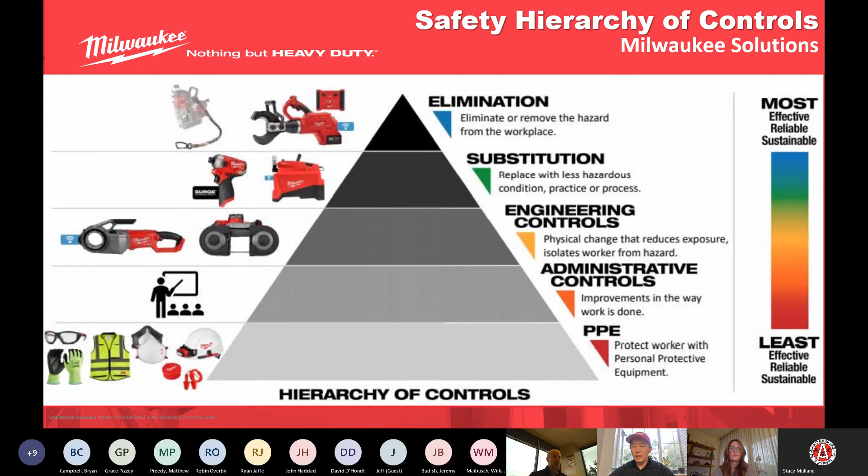And then other tools where we've completely eliminated the risk of injury altogether.

What we're trying to do is really eliminate, reduce, and prevent these main seven pillars of safety that we adhere to when we come out with product lines. We have a whole product line dedicated to dust, a whole product line dedicated to vibration and noise reduction, and ergonomics. We have our whole ergonomics division where we test the best way and the best posture for our users to hold these tools while doing a specific task, as well as built-in safety technology to prevent acute injuries with our rapid stop tools.

We have a huge range of lighting solutions to provide more visibility and reduce trips on the job site, as well as tools we launched this year called MX Fuel, which we'll talk about later, that completely reduce emissions caused by gas products. As things transition from fossil fuels to battery operated technology, we're trying to be at the forefront, and that's the reason we created the MX Fuel platform to power light duty equipment. Our PPE line really wraps everything up as far as preventing acute injuries and providing personal safety for our users. What we're really trying to do is drive a safer job site from start to finish.

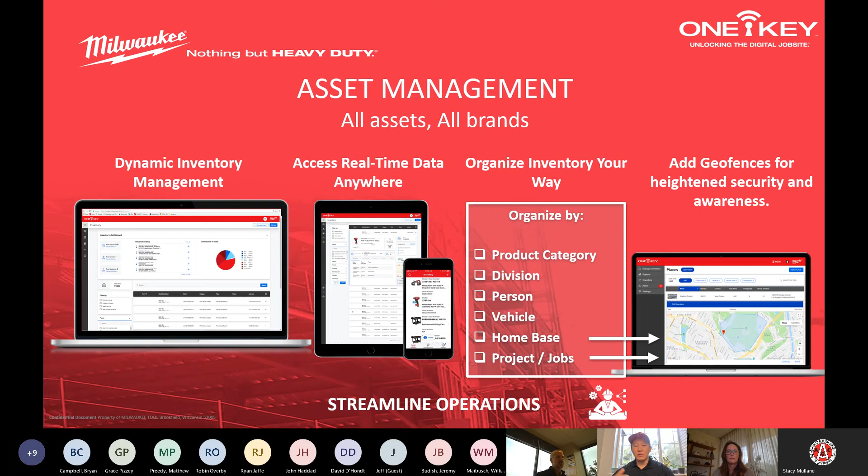The last thing I wanted to talk about is MX Fuel. This year we created six solutions to launch, from our power supply, our core drill that's a lot safer, to our cutoff saw and breaker, as well as our enormous tower light.

The other thing I wanted to present to you guys is our service. We have the industry's best coverage when it comes to servicing our tools and batteries. Our tools have a 5-year tool warranty, and our batteries are covered for 3 years, including any water damage that happens to them as well.

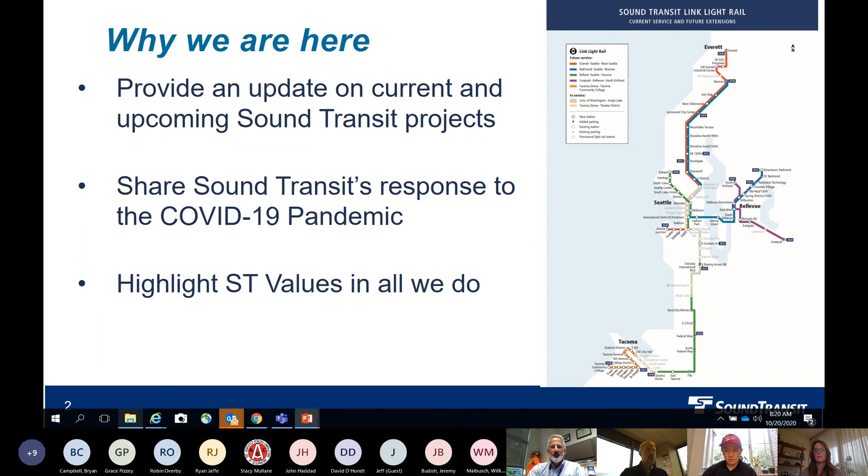So our values are collaboration, customer focus, inclusion and respect, safety, of course, integrity, and quality. I presented these before. I highlight these at every presentation that I do. We hold ourselves to these values, and we would expect, of course, our consultants and our contractors to hold themselves to these same values as well. If you're working for us, you're an extension of ST.

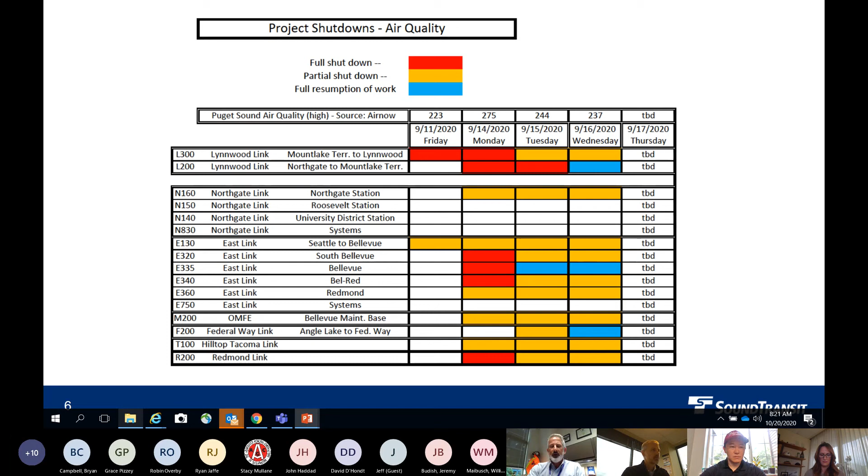Quick safety moment, of course. I wanted to thank all of our contractors for participating in AGC's Construction Safety Week, September 14th through the 18th. Of course, I found it a little bit ironic—that was the exact same week that we had what I call hazardous air quality due to wildfire smoke week. Contractors, of course, showed their usual resiliency and adapted, postponing some activities until the next week, but not canceling, of course, the very important safety week.

So I'd like to just run through real quickly what Sound Transit has done in response to the COVID-19 pandemic.

Then, of course, on March 23rd, the governor issued the Stay Home, Stay Healthy Order 20-25. Sound Transit Public Work was exempt from that—we were allowed to continue to work. However, at that time, we realized that we didn't really understand, as an owner and with the industry as well, what the best practices really were, and we were concerned about not being able to keep the workforce safe. And so through the month of April, we did issue a stop work order so that we could allow our contractors to incorporate all best practices, update their health and safety plans, work plans, get their workers trained and go back to work, and therefore minimize the risk of COVID transmission in the work zone.

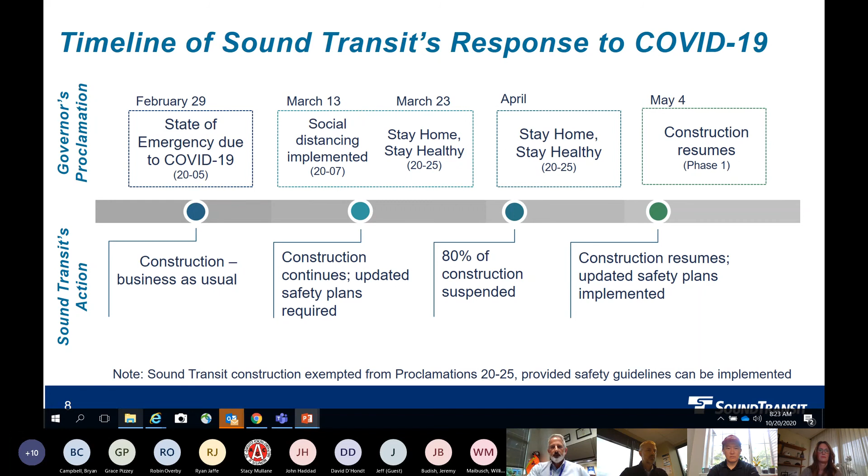During the work suspension period, of course, we had to secure the work sites. 80% of the work was suspended during that time. Only essential work and work that was subject to specific windows that couldn't be moved was ongoing.

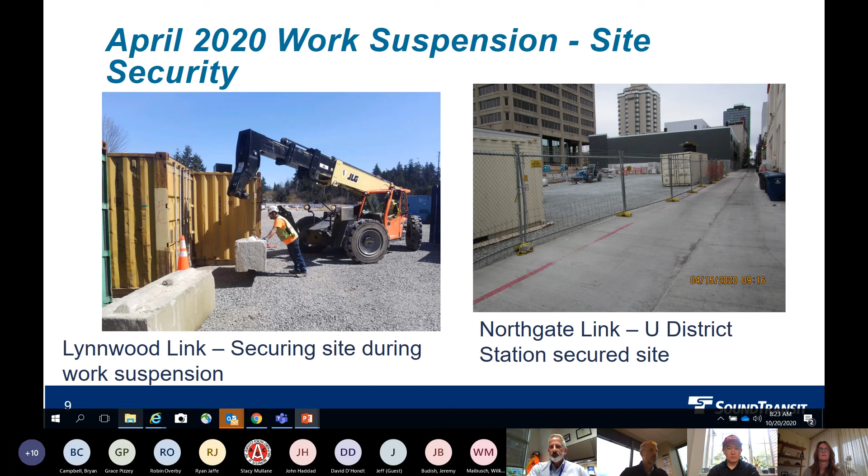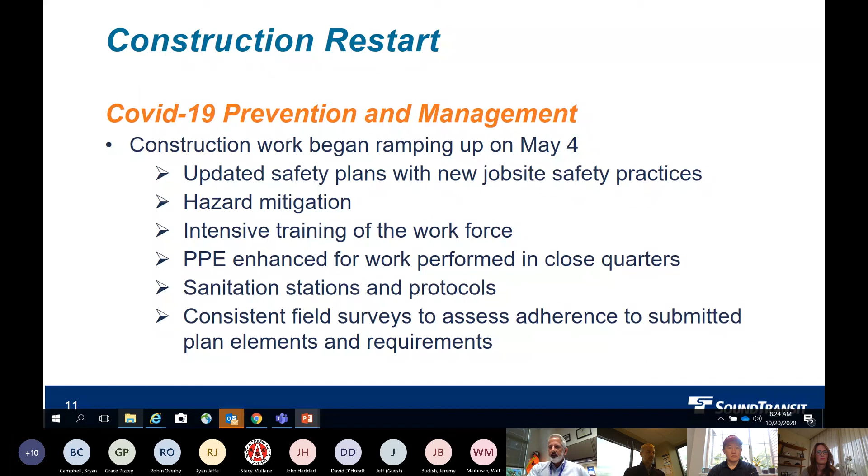After the month of April, we allowed the stop work order to expire. Work ramped up again on May 4th with updated safety plans. Criteria was derived from DOSH, L&I, and the CDC. New PPE, intensive training, sanitation stations and protocols on the work site, some of which you can see here. Temperature screening, attendance for contact tracing—all of that is still in play on ST jobs.

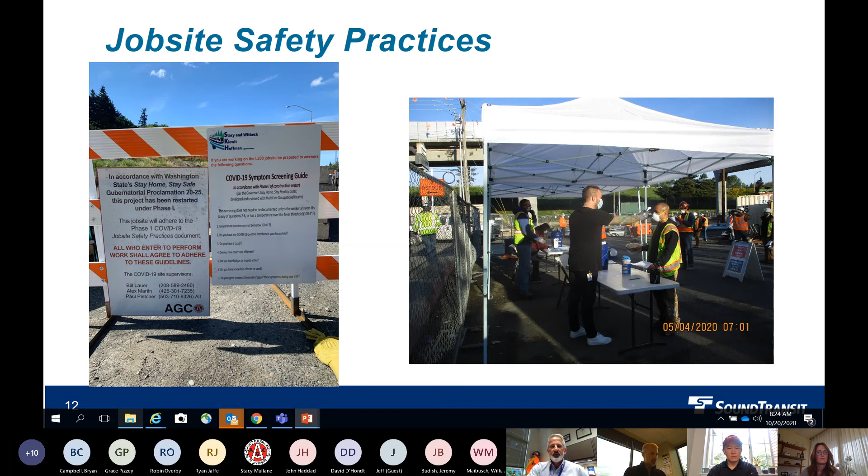And of course, revised meeting protocols, cleaning high-touch surface areas like you see on the right. This was an excellent example of collaboration across the board, all the way from the governor's council, including contractors, labor, local jurisdictions, and peer agencies across the country, trying to understand best practices so that we could have a unified approach and ensure safety for all.

A few challenges we're still seeing: culture change has been achieved from what we can see. Face mask fogging is still an issue, especially going into the colder months. I would ask all contractors to recognize and avoid complacency, especially in the field office. We've demonstrated the ability to not have COVID transmitting in the work zone, and that is key to continuing to advance our construction jobs.

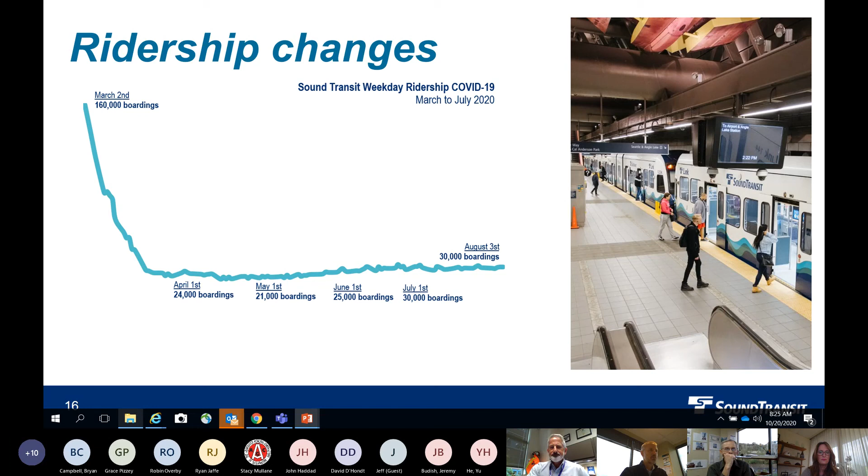Of course, COVID didn't just affect the workforce. Our ridership went down dramatically over the course of March to April. Sound Transit began studying ways to keep our riders safe. Goals were to achieve 100% passenger and employee face covering compliance, increase cleaning protocols on our conveyances, increase public information, and even go to the steps of weekly mask distributions and updating and increasing airflow and filtration on our vehicles.

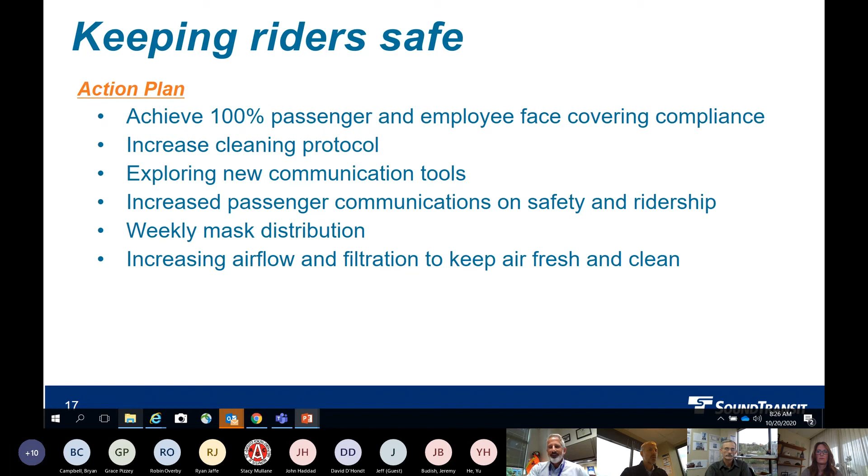September 2020, we began ramping our service back up again because demand is starting to increase. We even offer free masks — if you don't have a mask, that's fine, we'll give you one. It's important that we keep not only the workforce safe, but we take all steps we can to keep our passengers safe as well.

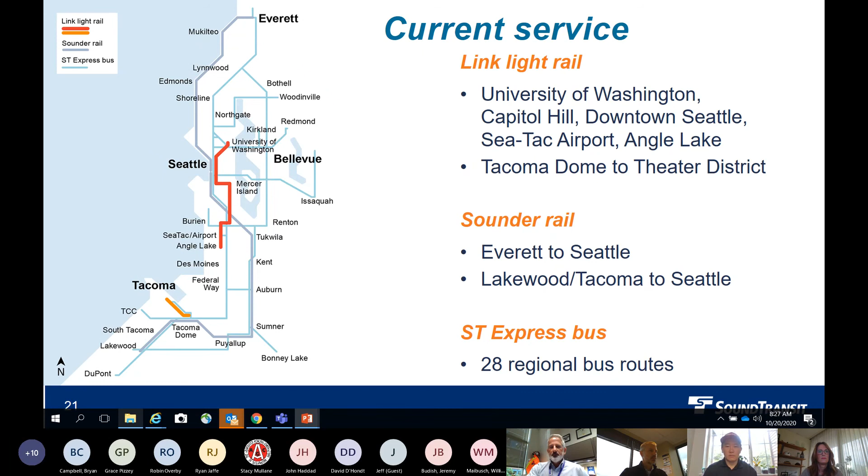So moving on to some updates from our current capital program. Many of you have seen this graphic before. Our current service is a fairly modest single light rail line going from just south of the airport all the way up to Husky Stadium, a Sounder commuter rail line going from DuPont all the way up to Everett, and our ST regional bus routes. Once our system expansion program is built out: 116 miles of link light rail, 83 stations, a brand new bus system called Stride, and expansion of over 40% in our Sounder commuter rail system.

So our construction is going on right now. Every day we have about 2,000 construction trade workers on the job across the program. We have 152 new light rail vehicles under procurement, 40 miles of light rail under construction, over $15 billion worth of active construction jobs across all phases, 9 major project alignments, 8 track bridges on I-90. Project expenditures right now are running about 94% of planned as of August, which is great.

And of course, we are One Sound Transit. We've had months where we're exceeding about $200 million of construction expenditure each month, so it's a very busy time.

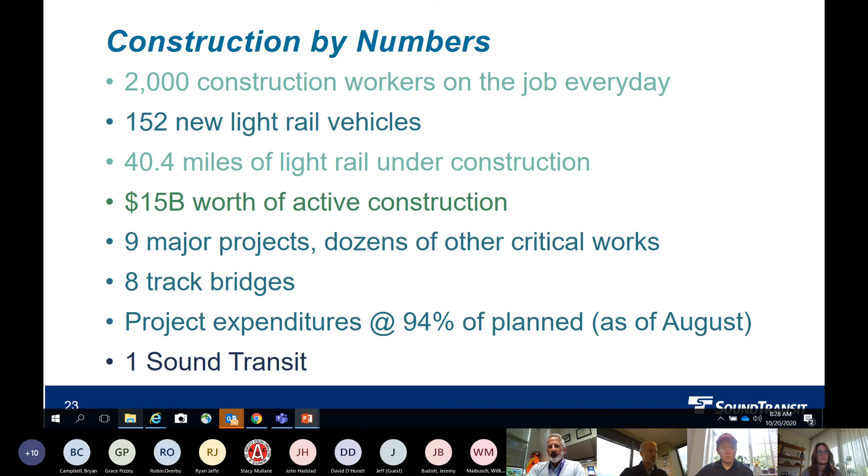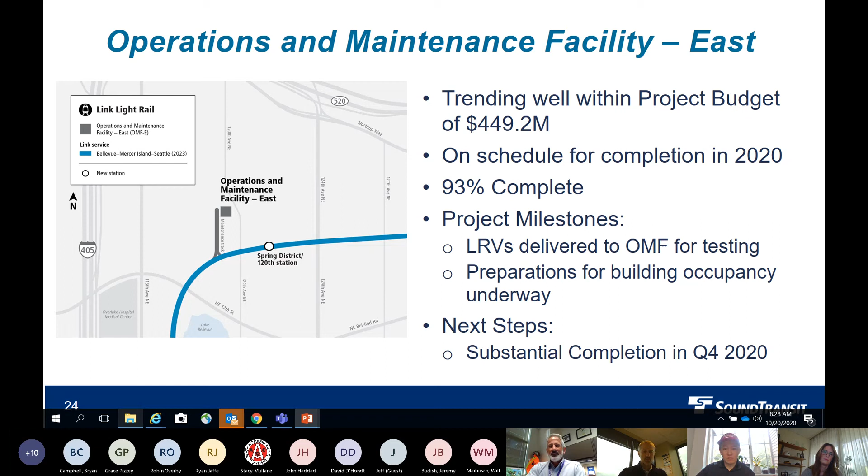Highlighting a few of our jobs: Operation and Maintenance Facilities East. This project is trending well, 93% complete, on schedule for completion in 2020 of this year. So by this time next year, this project will be 100% done. I would like to congratulate Hensel Phelps for delivering this critical design build job for us, and KBA and Associates as our construction management consulting team.

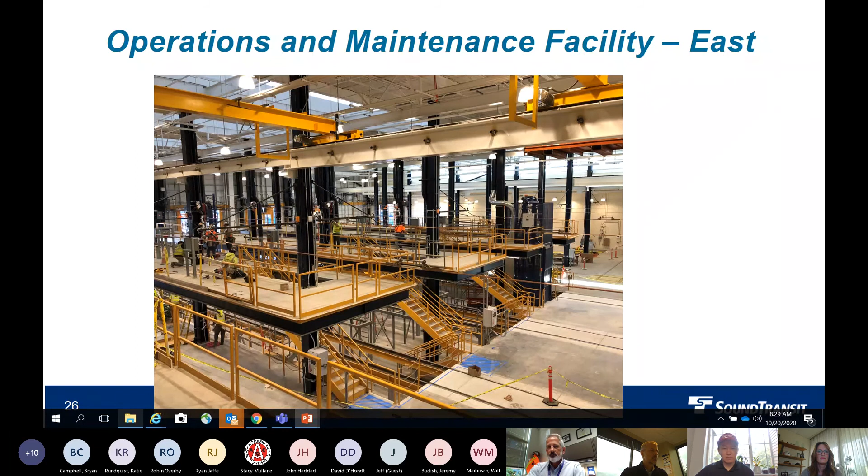Here's one quick shot of the interior of the building. The public can't see this yet, but you can see that it's primarily built out. We've had a few last minute revisions on the facility, trying to accommodate both types of fleet that are under procurement, because we have 2 different types of cars. So we're making some last minute modifications inside, and then we should be good to go. Upcoming milestones: certificates of occupancy for both the OMF and the maintenance of way buildings, as well as testing of the light rail vehicles in the facility.

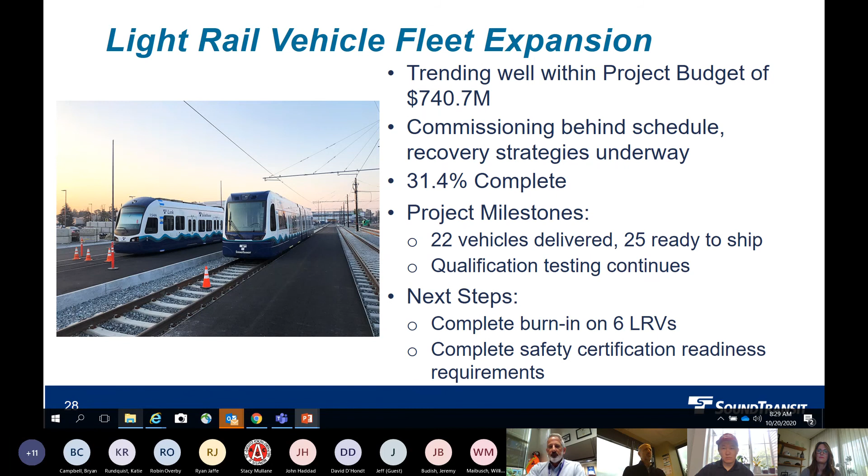A little known job: we do have our light rail vehicle fleet expansion going on too. This is a $740 million procurement, 30% complete, 22 vehicles delivered so far, 25 ready to ship, and we're starting to burn those in at the new facility.

Moving on to Northgate Link Extension. This one will be open to revenue service by September 2021, so that'll be a huge milestone for us. It's 96.1% complete. Key issues right now are safe execution of the remaining work, a lot of high rail work going on, and a lot of high voltage electrical work going on. Safety is paramount during this final stage as we work to bring this online.

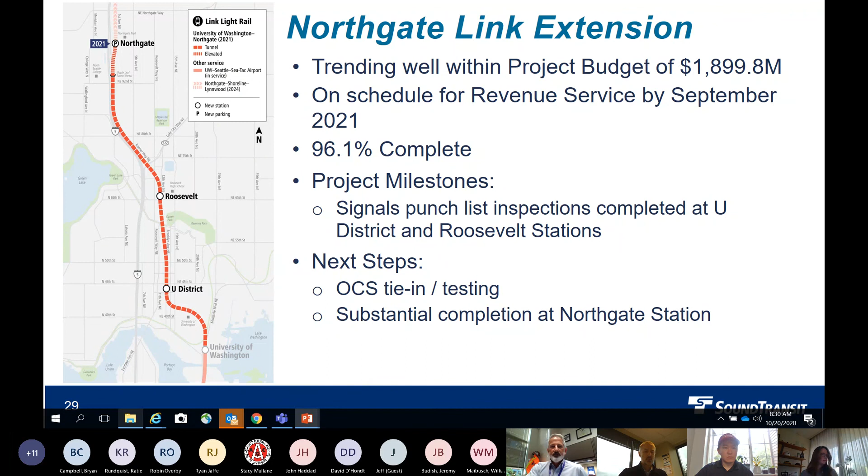I'd like to give special thanks to the designer of record for Northgate Link, McMillen Jacobs and Associates, and prime contractors Walsh, JCM, Absher, Hoffman, Stacy Witbeck, Mass Electric, and many others, and our CMC, North Star. Without all your help, we would not have been able to successfully get to where we are now.

Give you a little bit of a sneak peek into the interior of our underground stations. This is our N140 project, U District Station. As you can see, nearly complete, substantial completion earlier this year. O&M manual is 86% approved, and training is 100% achieved for this facility.

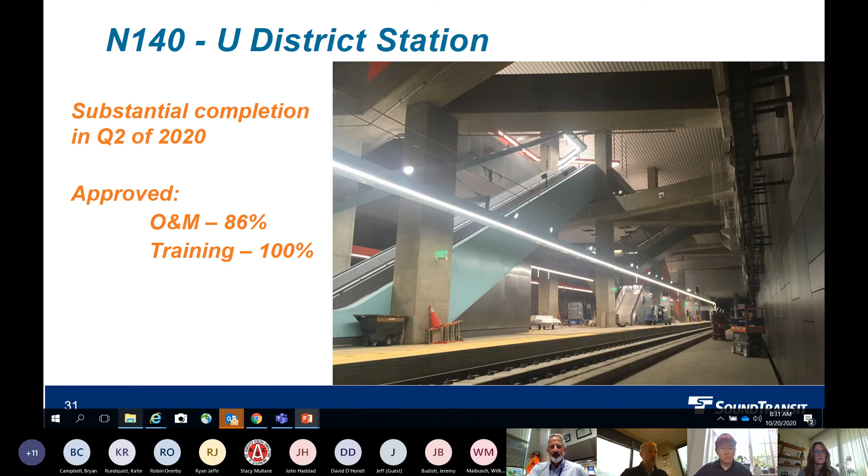N150 Roosevelt Station just up the way. This project also has substantial completion, a little behind on the O&Ms. Training is 100% complete on this facility as well.

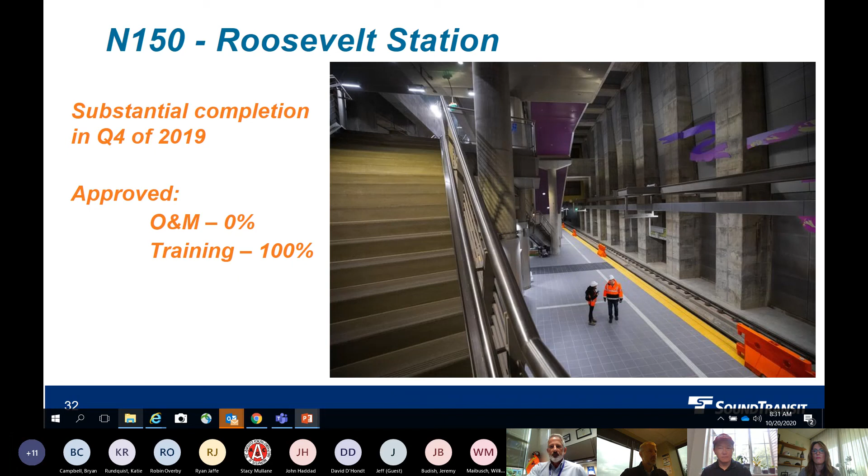And last but not least, on Northgate Link, we have our Northgate station at Northgate Mall. Substantial completion is pending any day now, just one little fire alarm test that's supposed to happen this week. This Absher contract should be substantially complete, so fingers crossed.

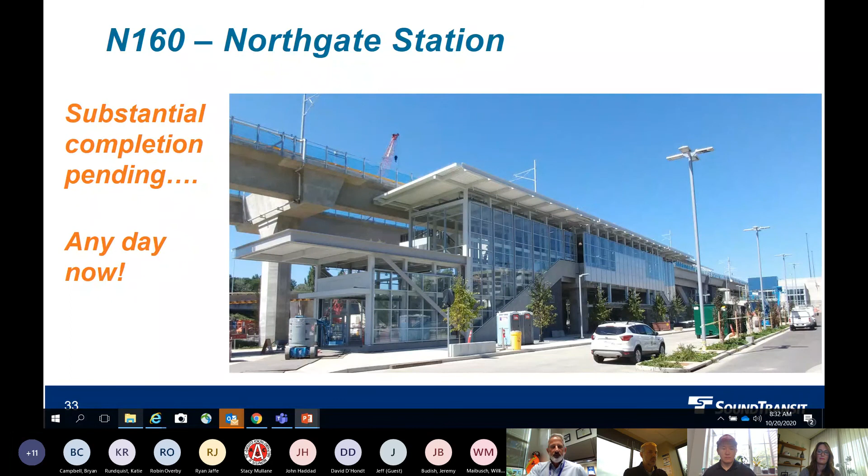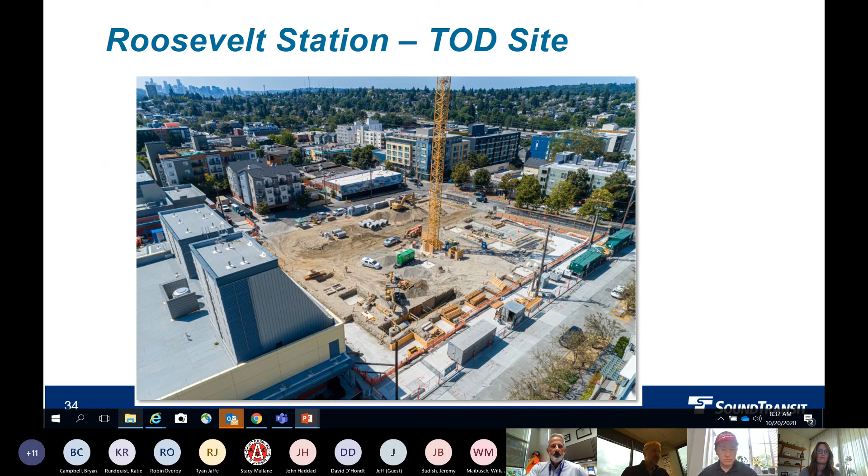Most of our projects now have a TOD site, a transit-oriented development site element to them. Here's a shot of the Roosevelt Station TOD site. That was our staging yard that is now being converted to build out, as you can see there.

Okay, that was Northgate Link. Moving on to Hilltop Tacoma Link extension. This project, 62% complete, opens for revenue service May 2022. This is a very difficult at-grade alignment construction. Walsh is our contractor.

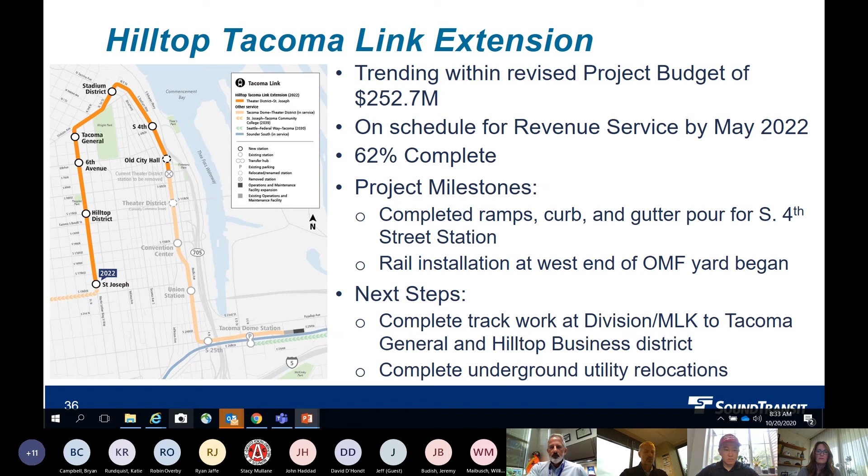This is what I like to call a utility relocation job with some track on top, which is really what it has been. As you can imagine, in a 100-year-old, 200-year-old urban area, we don't always know what's underground, but the team has been continually working through those issues, progressing this job, and we are on track to open this thing up in 2022.

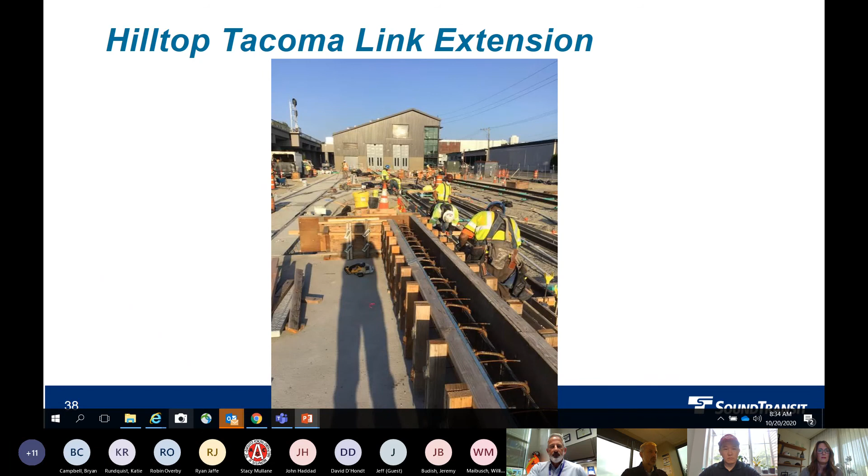This also has an OMF building. It's been expanded, as you can see in the background there, and an expanded storage track yard, which is in the foreground. That facility is going to be turned over to ST sooner than the rest of the job. So that's looking really good.

Little known job, we have a Puyallup station parking and access improvement project on the Sounder line. We're about 10% complete on that design build job, and that project will be opening in 2022.

East Link extension. This is our first branch line off the link system, scheduled for opening in June 2023. It is 85% complete. Project milestones, we do have substantial completion of our first contract, and that's the downtown Bellevue tunnel.

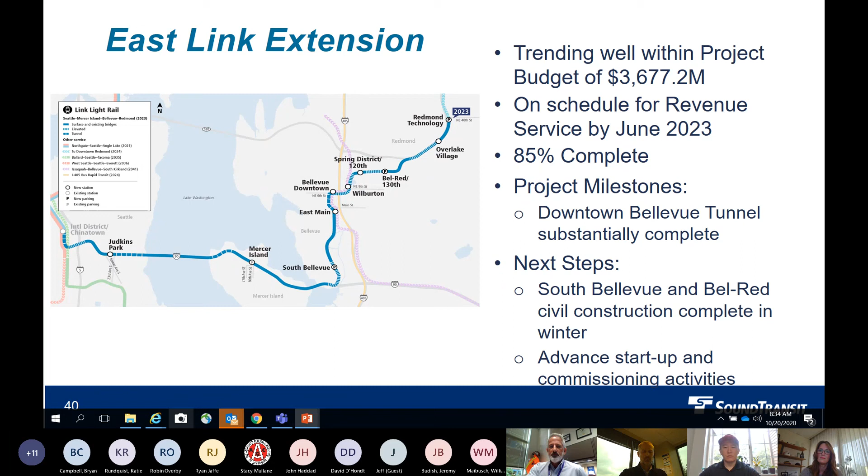We did have a highlight beginning of this year, and that was our completion of our Connect 2020 program, where we did tie in the branch line into the main line during a period where it would be least disruptive to the commuters.

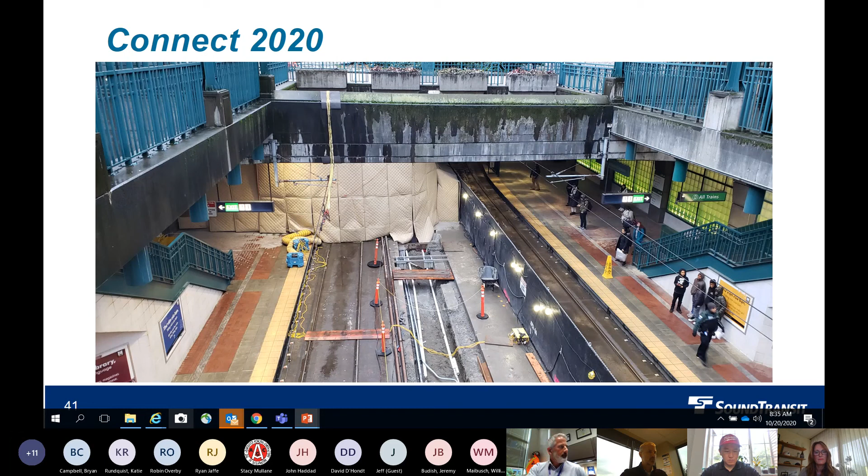I'd like to now take a quick opportunity, see if I can get this to play. Is the sound coming through on this?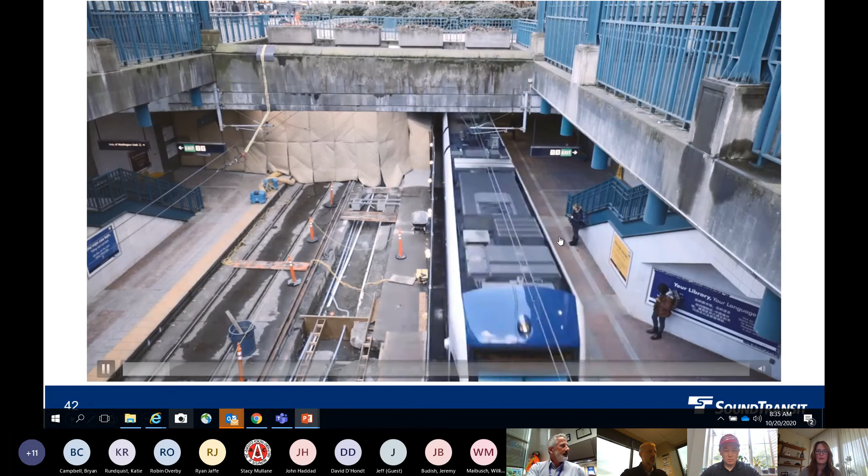Excellent. So this is a public information piece that we put together that is available on our website, highlighting the extensive effort that it took to tie in this branch line.

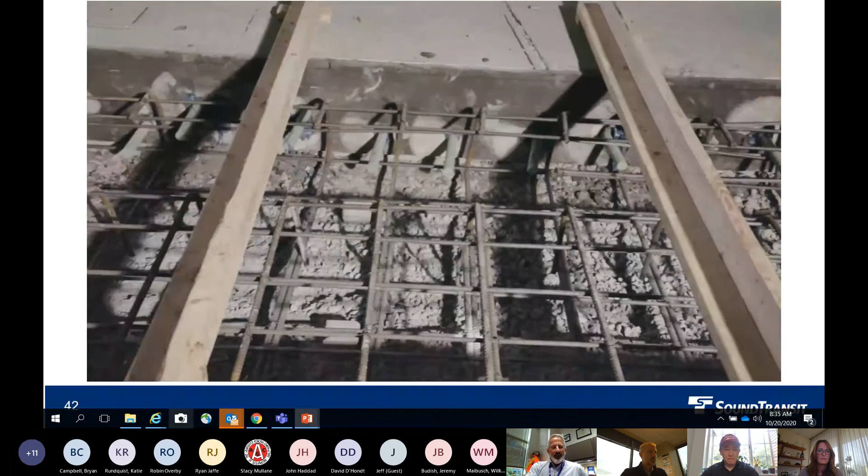Let's see. Okay, moving on to Eastlink, quick Eastlink tour.

Now we did have a little deal earlier this year where the E-130 floating bridge contract was featured on the Impossible Engineering episode, the Seattle Super Bridge. Hopefully folks got a chance to catch that.

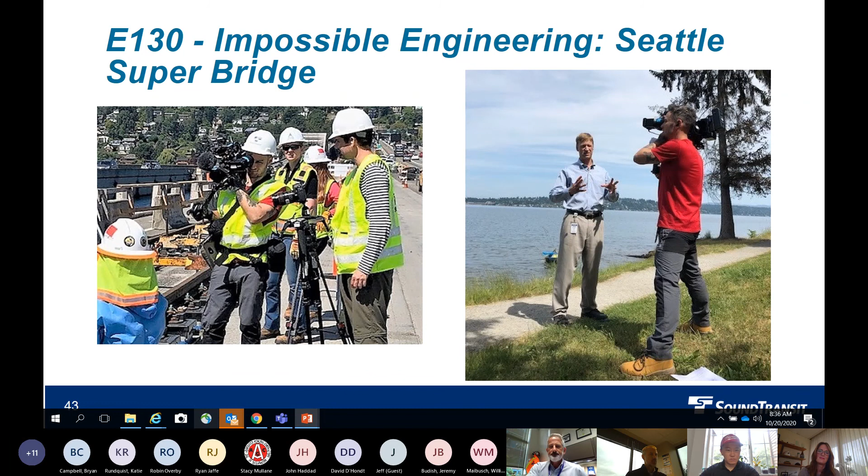Quick station tour of Eastlink. Our first station is the E-130 Judkins Park station over MLK. You can see that in stage of partial completion.

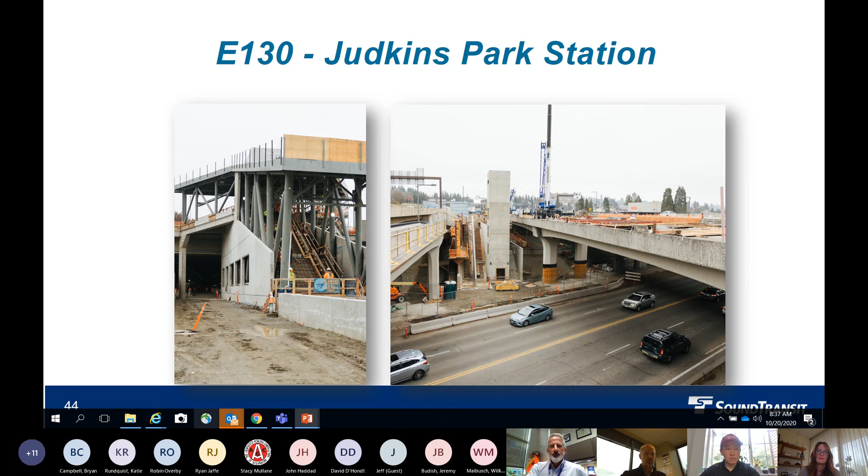Our next station is South Bellevue, right off of Bellevue Way, north of I-90. This station features our largest parking garage in the system that you can see off to the right. You can see the dual ramps, by far our largest parking facility in the network. Currently, the flat work is starting to go in around the station, artwork's starting to go up. So good progress being made on that facility.

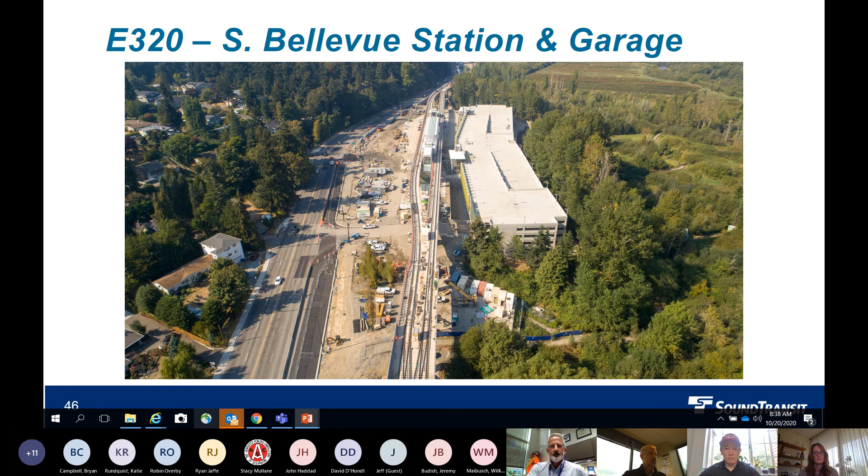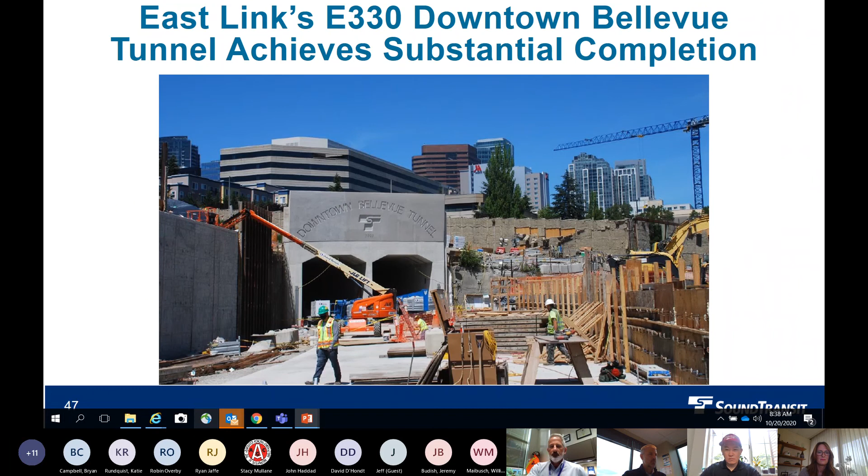Eastlink's E330 Bellevue Tunnel achieved substantial completion earlier this year, our first Eastlink project to reach that milestone. That's the portal on the south side. Here's a bird's eye view of the portal on the north side, looking down from City Hall, where plenty of city inspectors can look right into our work site. That's always nice to have. And here's a look into the tunnel on the right-hand side of the slide.

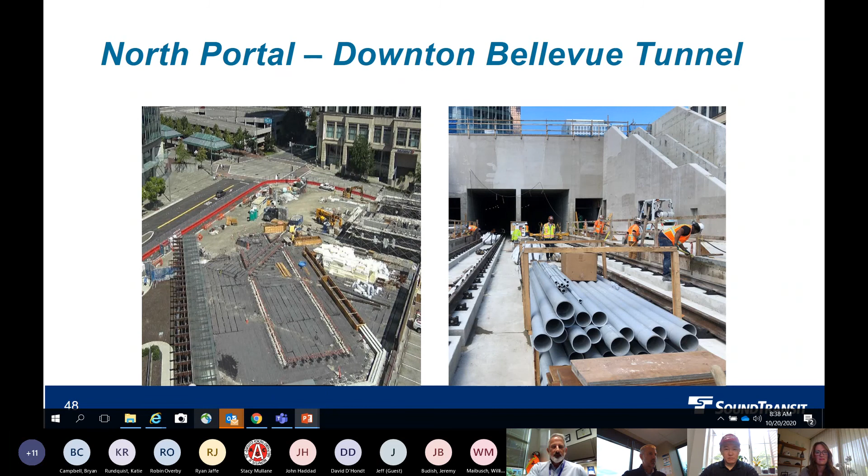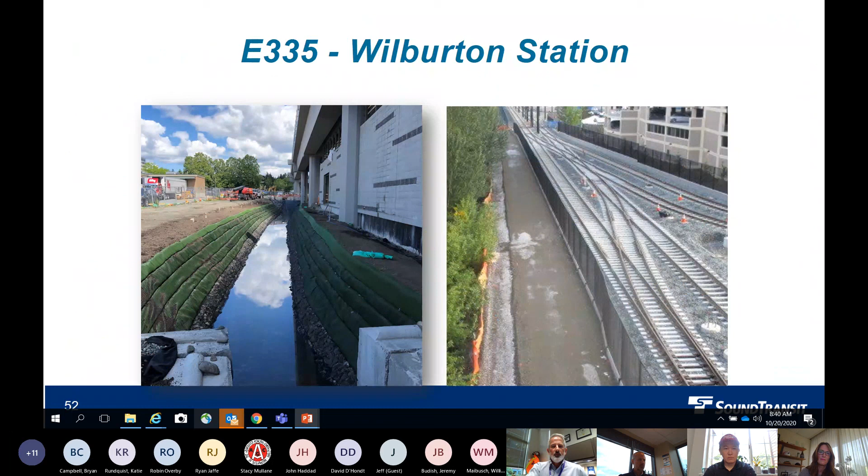Moving beyond downtown Bellevue, you can see our downtown Bellevue station as we're looking across I-405. And this is looking back towards downtown Bellevue. They've got a long span over I-405. You can see the trackway coming up out of the ground. Then we have a nice long gradual horizontal curve, elevated guideway, going into the Wilburton station, which is elevated. That transitions down to at-grade, as you can see on the right slide. And then we go into the 120th Street station, as you can see here.

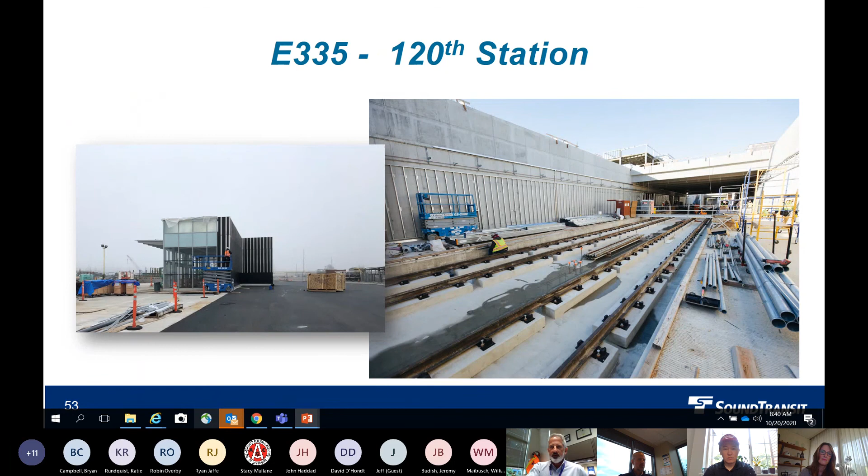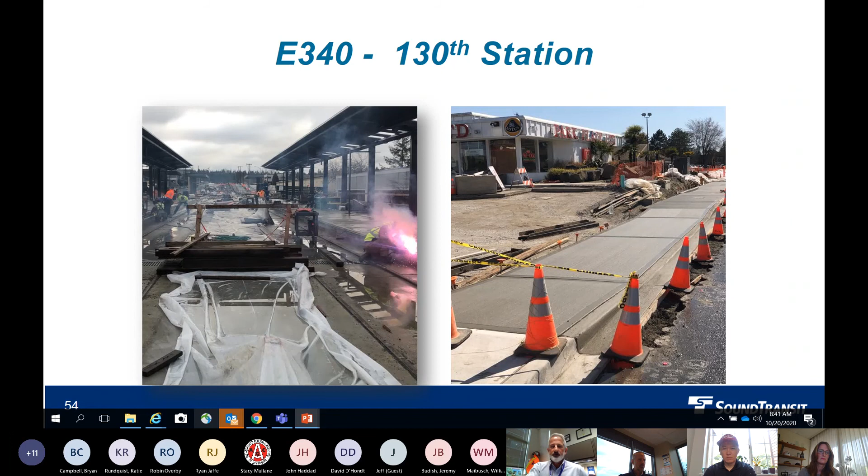We move beyond that over into the E340 Kuney contract. They have the 130th at-grade station that you can see there. A big milestone on this one is that almost all of our sidewalks and roadways are restored on this job. It's at-grade, a little more economical to construct, but logistically challenging, keeping all the businesses open and satisfied along the construction zone. So good job on Kuney getting us to this point.

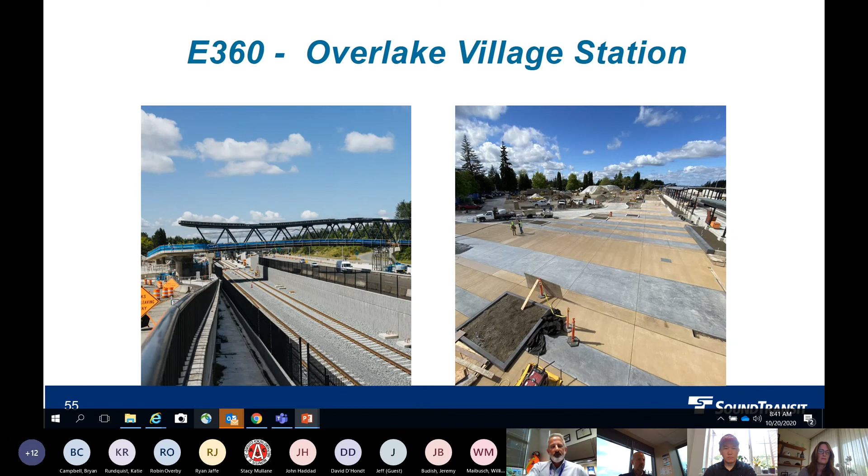Finally, moving on to the E360 Overlake Village Station. This is our design-build contract on the far end of Eastlink. You can see our pedestrian bridge going over SR 520 there. This is our Overlake Village Station. And last but not least, our final station on Eastlink is the Redmond Technology Station that you can see here.

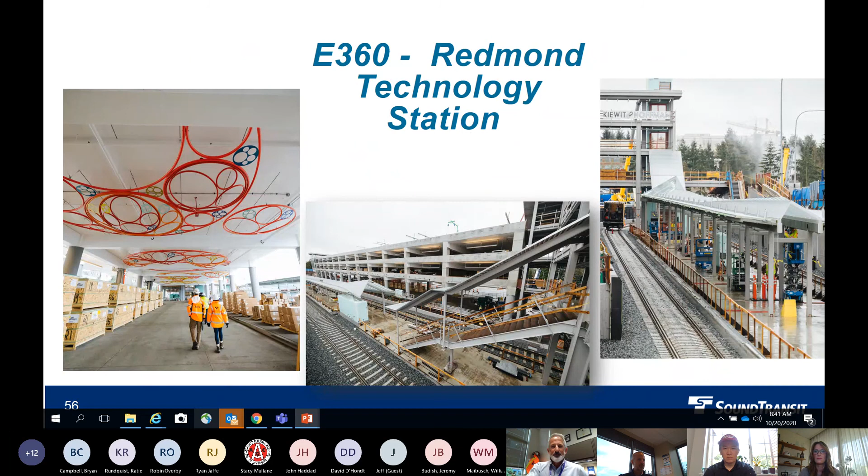So now moving up north, Lynnwood Link extension. We have three different contracts going up there. The southern contract is Stacy and Witbeck Kiewit, the northern contract is Skanska, and then a systems contract overlaying the whole thing, which is Mass Electric. This project is 24% complete. If you've driven up I-5, it looks very impressive. Right now, a lot of superstructure is going up on the south lot, and drilled shafts are going well on the north lot. We've achieved a fairly small milestone, but it's significant - setting the girders between Northgate Station and the first pier of Lynnwood Link.

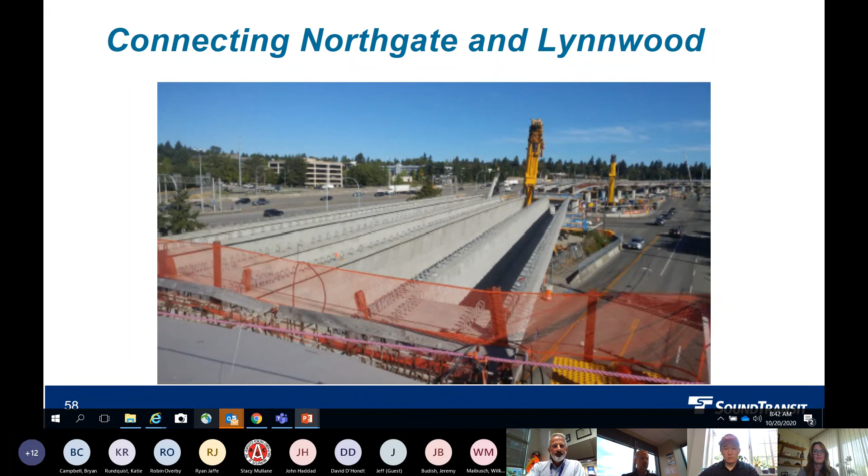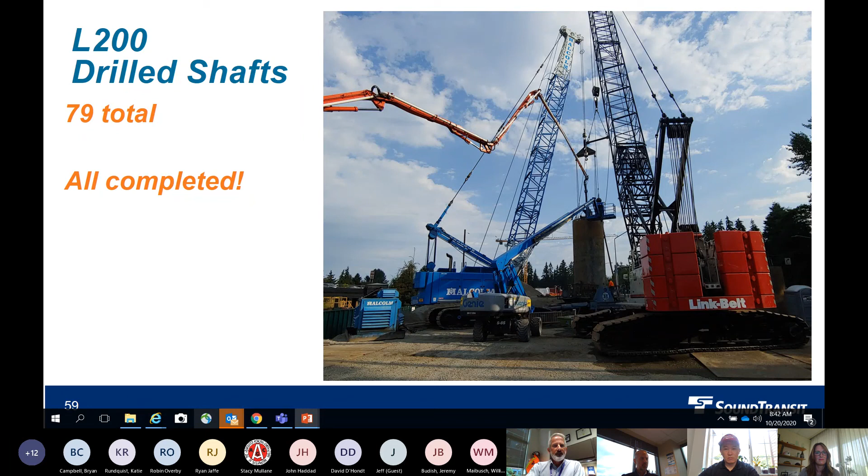So we've actually connected Lynnwood Link to the Northgate Station. That was a nice milestone to achieve. L200, the southern lot, is definitely out of the ground. All drilled shafts are done, many columns are done, and girders are going up on that job. There's a lot of earthwork on that job too. If you drive up through there, the amount of earthwork and retaining walls is significant, in a constrained work zone, sandwiched between the freeway and the neighborhoods.

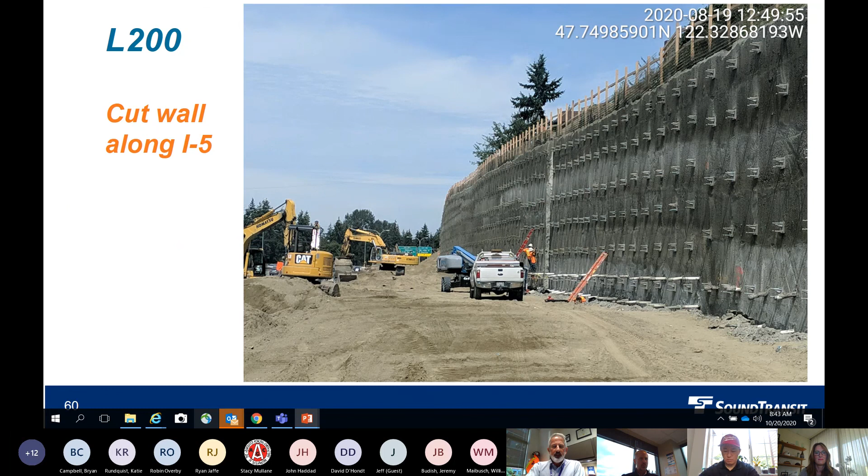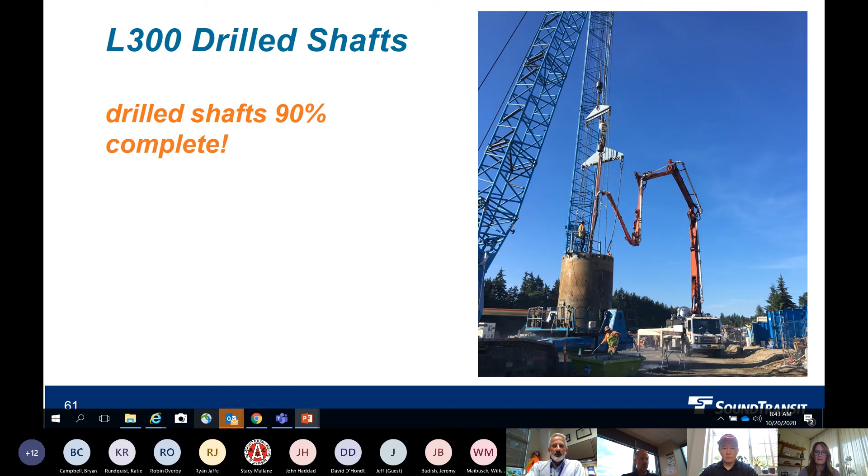L300, the Skanska job - shafts are about 90% complete, and we're almost out of the ground on that job. I really like underground work, I think it's a lot of fun, but at the same time, it's always fun to be out of the ground too.

One of our more interesting pieces of work is we're building a temporary trestle across a swamp or wetland, going up to the final station at the Lynnwood Transit Center. You can see some of the temporary trestle work being constructed there.

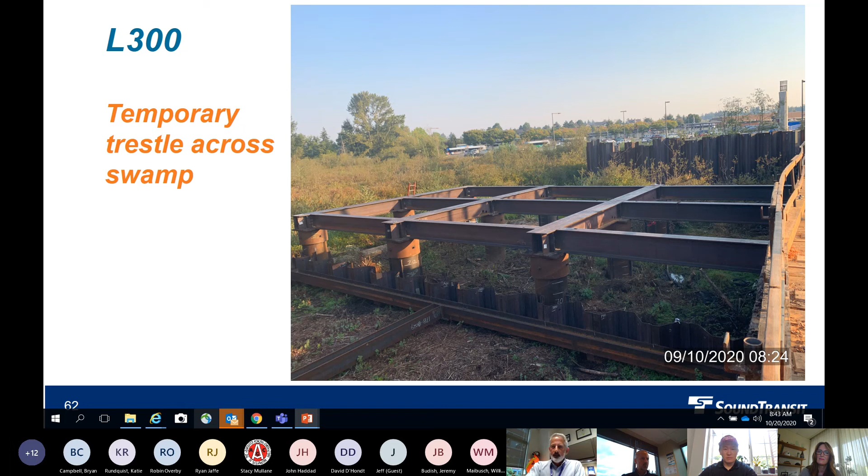Also on Lynnwood Link, we are preserving the ability to add an infill station at Northeast 130th Street. The substructure was modified to accommodate this. We're about 16% complete on the construction, 60% complete on the design. We're not sure exactly how we might contract this out - we might add it to the job, or go out and do a competitive procurement for this infill station. So there's a potential opportunity there.

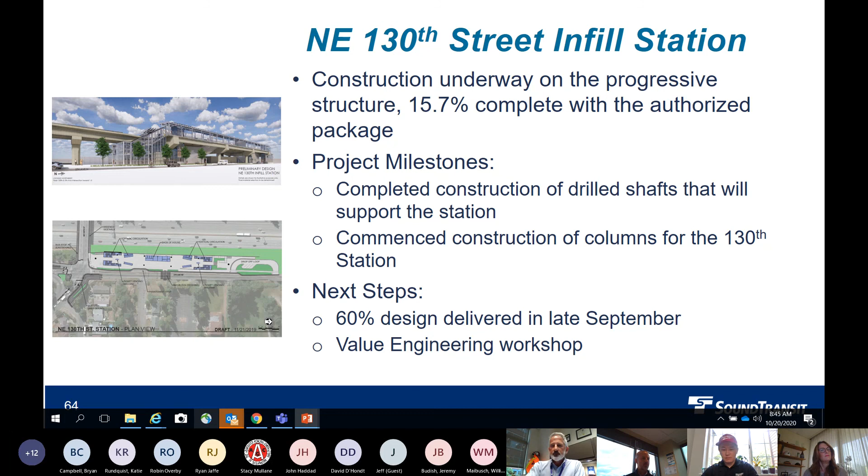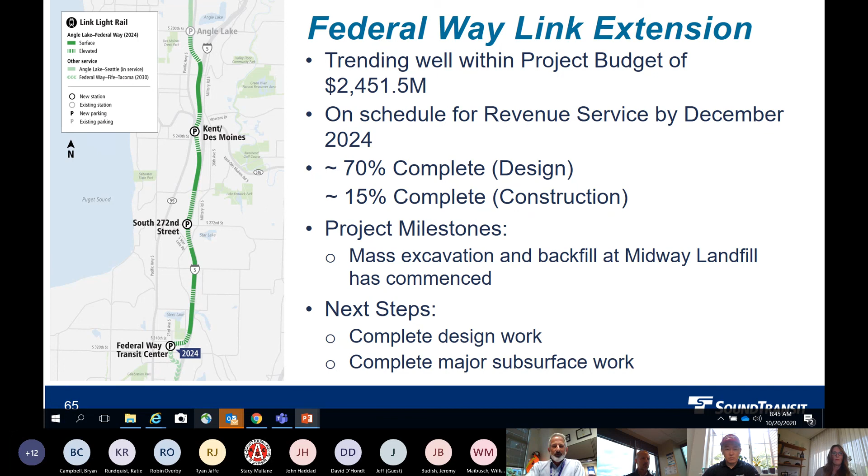Federal Way Link - this is our largest contract by far. It's a $1.4 billion design build contract. The overall budget incorporates many different phases beyond just the construction. Open for revenue service December 2024, 70% complete on design, 15% complete on construction. A lot of interesting work going on at the Midway landfill right now.

We'll keep on with my trend of showing all the stations. Obviously, this station has a long ways to go. This is the Kent Des Moines station near 236th and SR99 - I'm going to have to correct that, that's State Route 99.

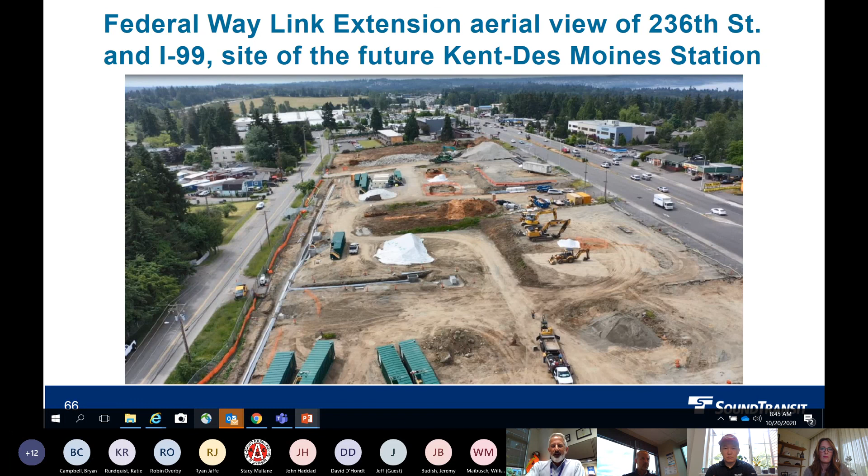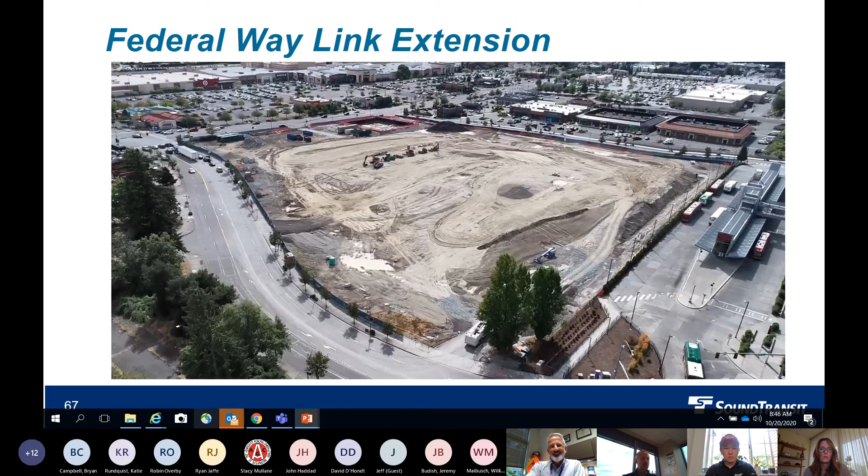This is a look at the Federal Way Transit Center station. Obviously, it's been cleared - a lot of work to do there. You can see the existing bus loop on the far right-hand side that the station will integrate with.

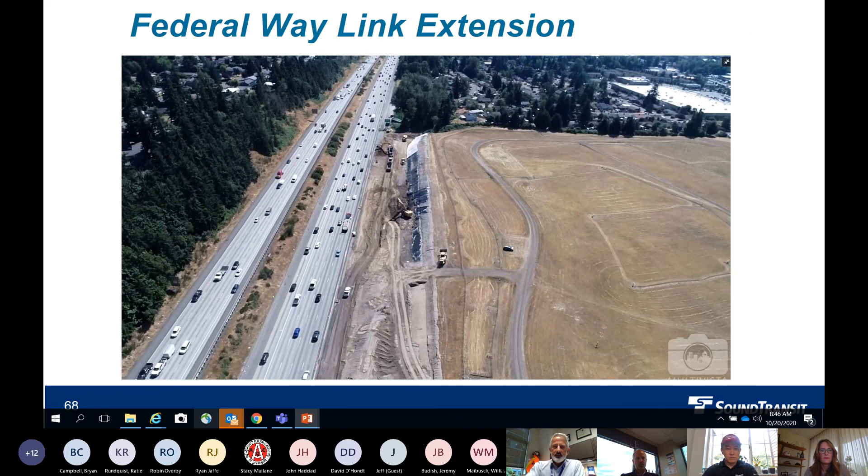Here's an aerial shot of the at-grade work to clear out some of the trash in the Midway landfill and do ground improvements through there. Extensive work - there's a lot of garbage to remove. Some of that is on SPU Midway landfill side, some of it is on WashDOT side. Haven't had a chance to ask Bill Grady of KLB if he's found anything interesting in there yet, but I'll catch up to him and see if there are any treasures that have been unearthed in there.

All right, moving on to the Downtown Redmond Link extension. This takes off at the end of East Link, beyond the Keywood job, the design build job we highlighted at the end of the line. So Downtown Redmond Link extension is a separate alignment, an extension of that. Design build, we are on schedule for revenue service by December 2024, 14% complete - most of that is design at this point. We've just now really started to open up the ground on that job, right in time for winter, of course, so erosion control is going to be key. A lot of sensitive areas around that area.

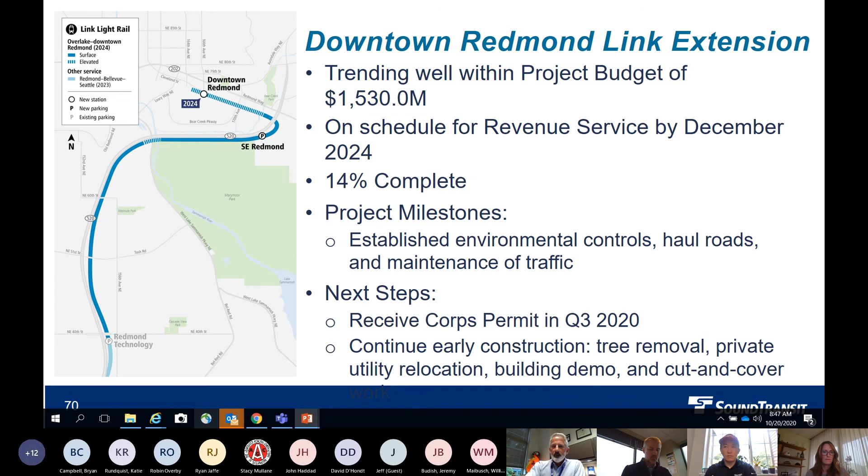Okay, so that's what we have going right now - a lot of work, a lot of momentum. I'd like to take a moment to highlight that all of our ongoing construction is fully funded, fully dedicated to completing them. There's no cash flow issues. We have had an economic downturn, of course - we all know that, and I'll get into some of the details on that here in a bit - but it is not affecting any of our ongoing construction work.

So now I'd like to run you through a quick status on our future construction. Now keep in mind the schedules you're going to see here are pre-COVID-19, all right? So these schedules are likely to change, but it's too early for me to say exactly which schedules may change. Just suffice it to say that at least some, if not all of them, will get revised through a process through the Sound Transit Board that I'll go into at the end of the presentation.

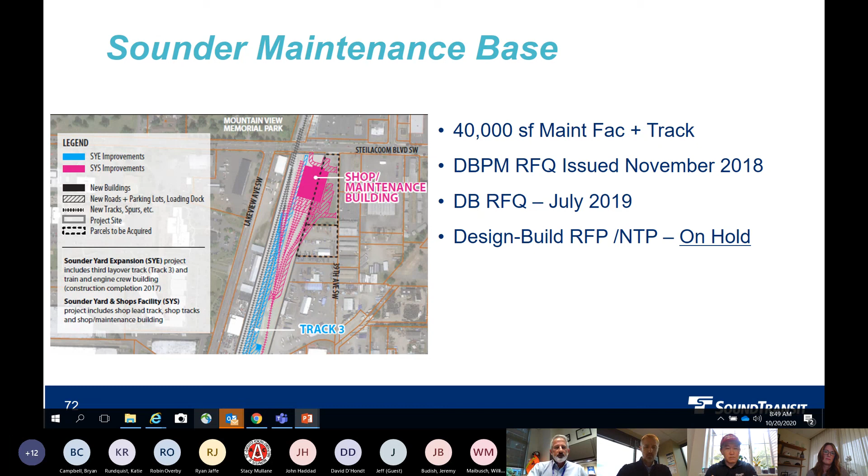First off, Sounder Maintenance Base - this project we had procured a DBPM for, a management firm. We were slated to go out to RFP and NTP later this year. It is currently on hold, basically waiting for the Sound Transit Board to make a decision as to whether this is a project that's going to continue to go forward on the same timeline.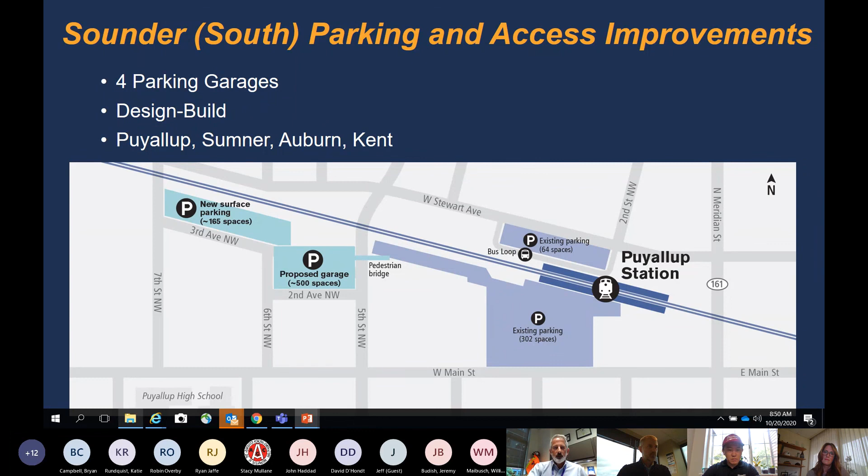Our Sounder parking and access improvements - we have four of those: Puyallup, Sumner, Auburn, and Kent. Puyallup, as we mentioned, is already under construction. The schedule for Sumner, Auburn, and Kent is also up for further consideration.

Bus Rapid Transit, or STRIDE - a 45-mile corridor going from Burien all the way up to Lynnwood, with a spur route from Bothell over to Shoreline. 24 BRT station pairs, 12 cities, 6 new or expanded parking facilities - many of those would be parking garages - and a transit center and a maintenance base. This was slated to open in 2024; we always knew that was going to be a very difficult mark to hit. This project's schedule is under consideration through the reassessment process.

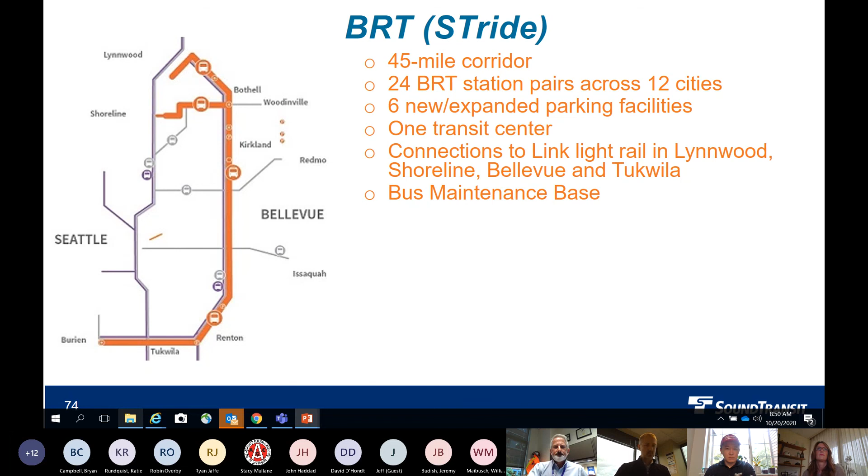Tacoma Dome Link Extension. This was scheduled to open in 2030, 9.7 new miles of light rail going from the end of the new Federal Way extension, which is under construction, all the way down to the Tacoma Dome area. 4 new stations, 2 parking garages.

Groundbreaking scheduled for 2025. Has an OMF facility associated with it, scheduled for 2026. Whole thing's supposed to be open in 2030.

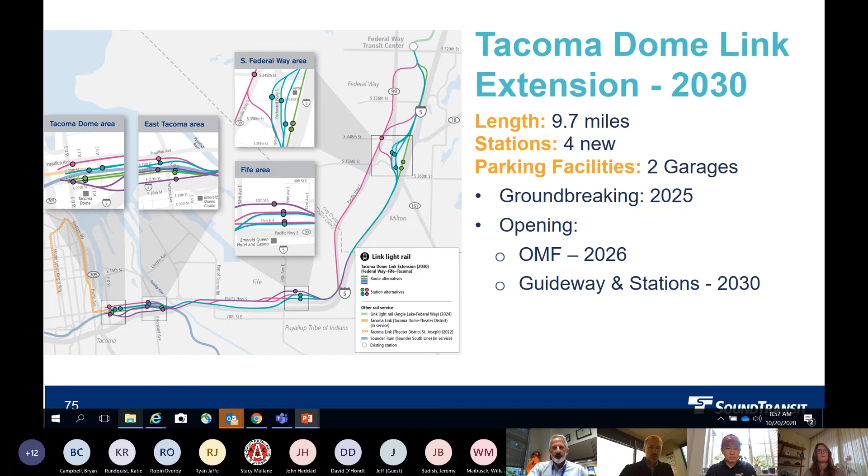Preliminary estimate range $2.7 to $3 billion in construction work. And the OMF South preliminary estimates have been 800 million to 1.4 billion, but of course those are still going through VEs and contracting methodology studies, so those numbers will be updated after more studies have been completed.

Here's a shot of just a few of the different alternatives for Tacoma Dome Link extension. There's a few decision points that still have to be made as to which alignments will be used, but we do have a preferred alternative through much of the alignment. This project will feature the Puyallup River Bridge.

We're currently planning a 560-foot balanced cantilever concrete cast-in-place clear span. Very challenging piece of work. We do have an option for in-water piers. Not sure exactly which way that'll end up yet at this point.

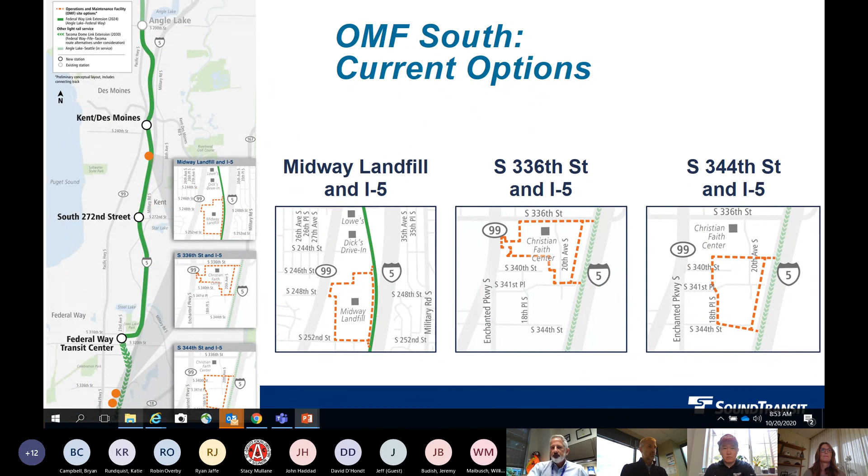All stations along Tacoma Dome Link are elevated. Still have 3 options on the table for the OMF South: Midway Landfill and I-5, South 336th Street and I-5, and South 344th Street and I-5.

So just a summary of the timeline here. We're still in the planning phase, final planning phase. Current schedule, start of revenue service 2030, subject to change.

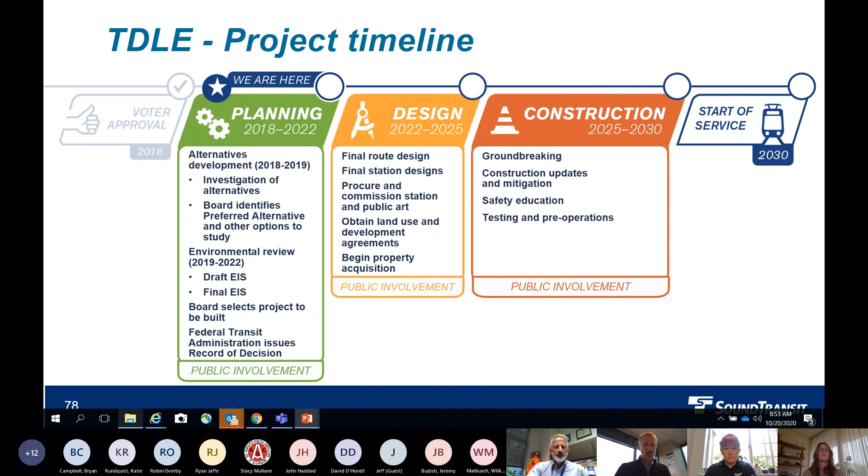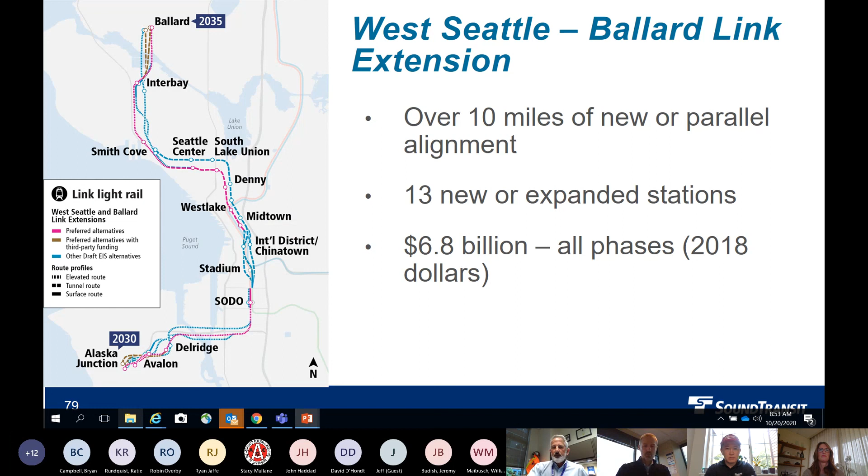West Seattle Ballard Link extension, over 10 miles of new alignment, 13 new or expanded stations, $6.8 billion across all phases.

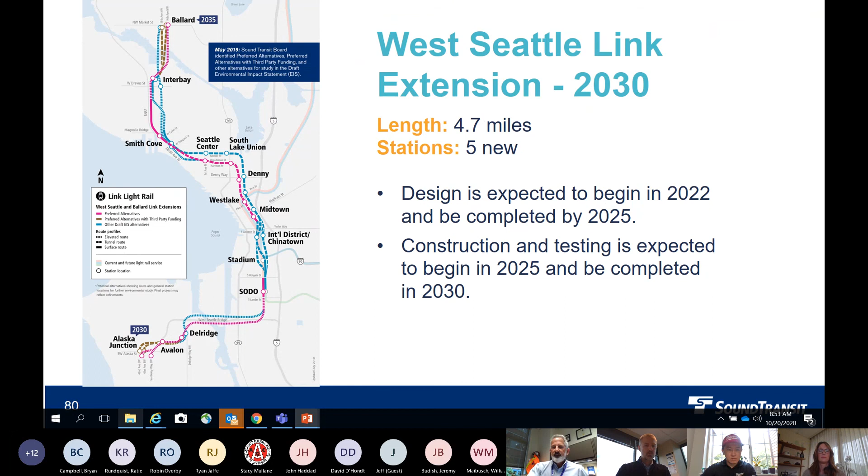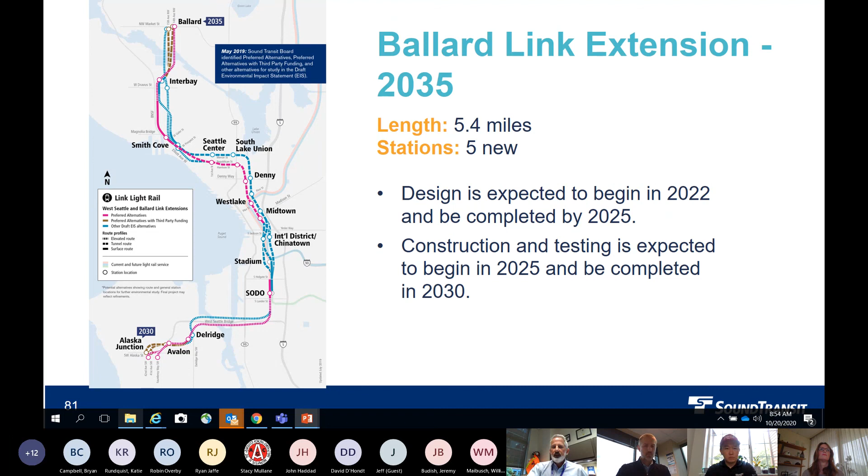This will be delivered in separate timelines. West Seattle scheduled to open in 2030, about 5 miles of new alignment there, 5 stations. Ballard, 5 years later, opening in 2035, 5.4 miles, 5 new stations.

And of course, along with that would be our new downtown light rail tunnel, also opening in 2035, just under 2 miles long. Several new underground stations associated with that.

We are still looking at several different tunnel types for downtown. We're looking at a single bore, we're looking at twin bore, variations of different types of single bore, excavated caverns underground, mined through stations, doing some contracting packaging workshops beginning of next year.

So this will start, the whole Ballard West Seattle procurement will start to flush itself out probably by middle of next year. We'll have a pretty good idea how we intend to deliver these.

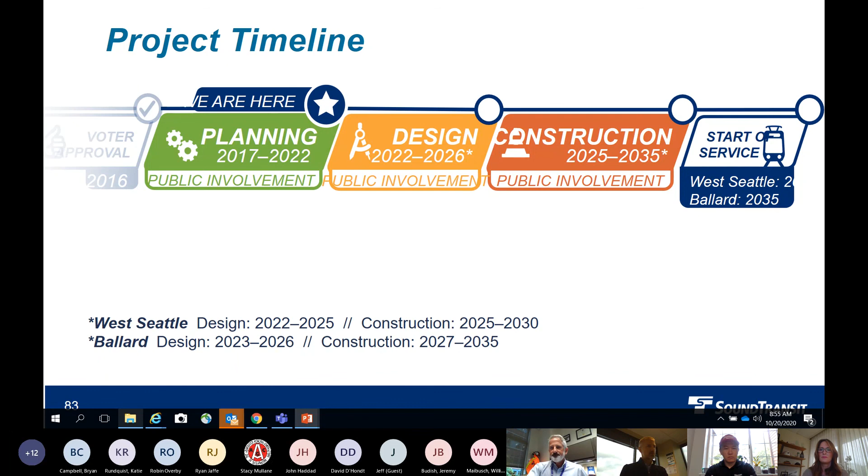Once again, project timeline, we're still in the planning phase here. West Seattle opens 2030, Ballard opens 2035, subject to change. Currently refining preferred alternatives. All right, Everett Link extension,

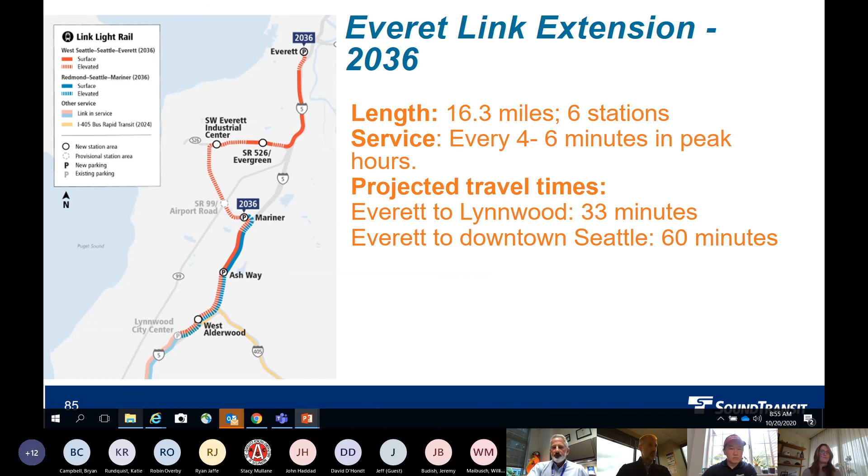16.3 miles, scheduled to open in 2036. And this is still in the planning phase as well. And CM is just starting to get involved with constructability efforts with the planning team on this job.

2039, we're scheduled for additional Tacoma Link extensions down to Tacoma Community College. And last but not least, we have the South Kirkland-Issaquah Link line opening in 2041. Separate alignment from Issaquah to downtown Kirkland, 12 miles.

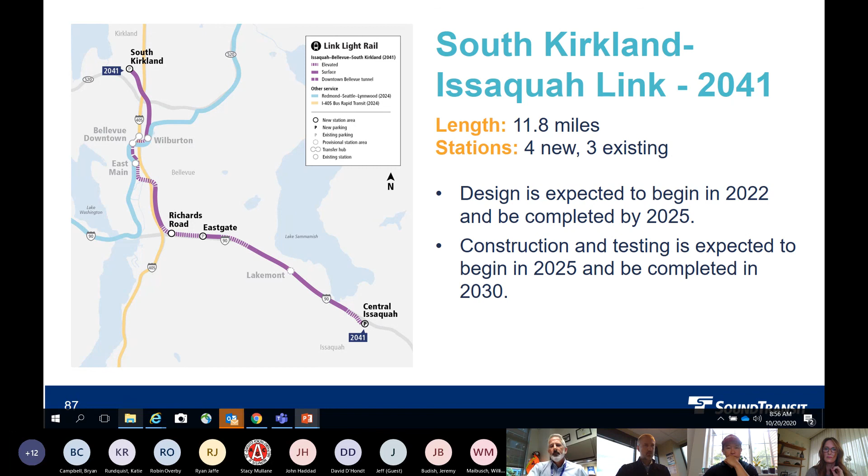Design scheduled to begin 2022, complete 2025. Construction, actually, you know, I think the dates on this one aren't quite accurate, so we'll probably have to update those because it's scheduled to open in 2041. Once again, subject to change.

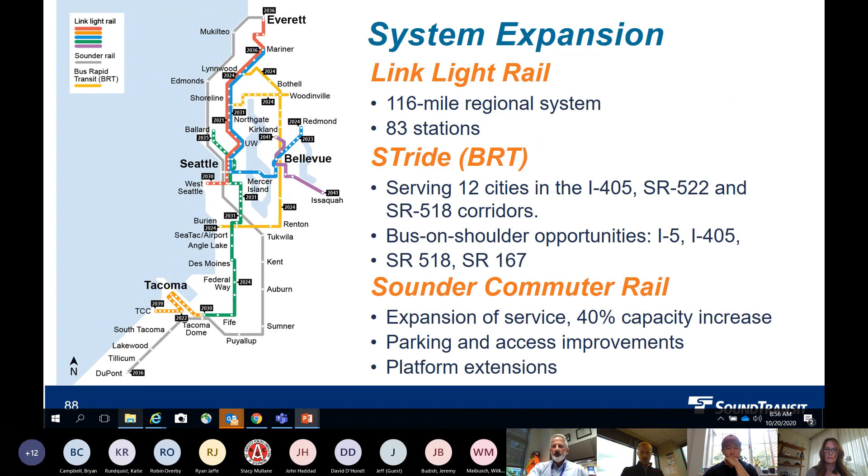So once we're all done, 116-mile regional system, 83 stations, fully functional BRT system, expanded Sounder commuter rail for additional 40% capacity.

So we all know that Sound Transit is undergoing a capital program realignment process. We did hear a presentation from our Chief Financial Officer, Tracy Butler, at our Finance and Audit Committee last week. Her presentation is available on our Sound Transit website under our board meetings. You can go there and click a link and see her presentation in detail.

So I won't run through a lot of the numbers here. There was some good news this last week at the audit committee meeting, and that is our forecast for revenue loss in 2020 to 2021 is now less than half of what we originally projected, falling from an estimated 912 million shortfall to only a $300 to $400 million shortfall.

However, the long-term projection for 2020 to 2041 is now a pretty wide range of $6 to $12 billion shortfall with considerable uncertainty. It's hard to say exactly what the economy will do. We're projecting a moderate recession or a severe recession, and we'll be able to provide options for both of those by the time Sound Transit needs to make a decision as to their capital program realignment in the middle of next year.